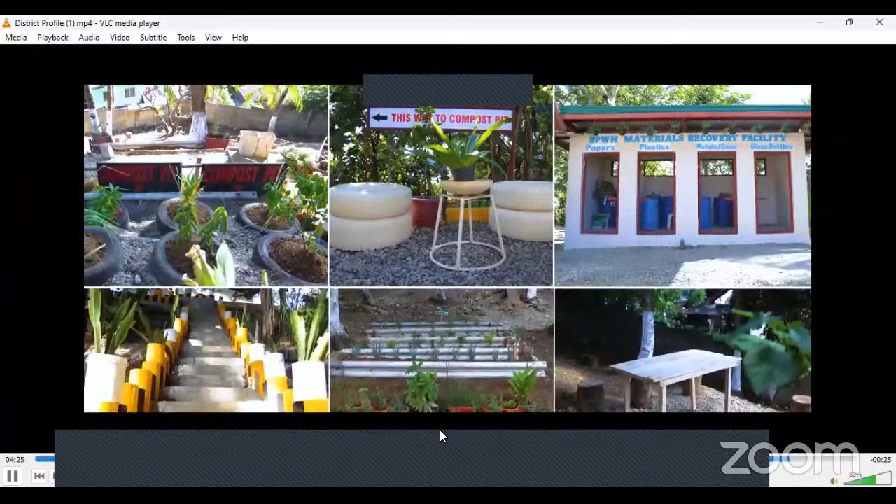The district does not only work on improving lives through quality infrastructure, but also works on refining lives by protecting nature. The agency supports environmental activities, maintained and improved its environment-friendly workplace, in which the district earned its nomination as one of the eco-friendly DEO in the Philippines.

The Department of Public Works and Highways Surigao del Norte's 2nd District Engineering Office humbly started with a goal to be an instrument of economic growth. Along with its colorful history, DPWH is now a steadfast agency of the province. Located at the gateway of Mindanao, the district plays a major role in the infrastructure development that focuses on the improvement and widening of roads, bridges, as well as flood control systems, school buildings, and other public facilities.

Its jurisdiction covers 11 municipalities and 1 component city. Currently, the district has a total workforce of 418 employees, 351 job orders, and 67 budgetary personnel.

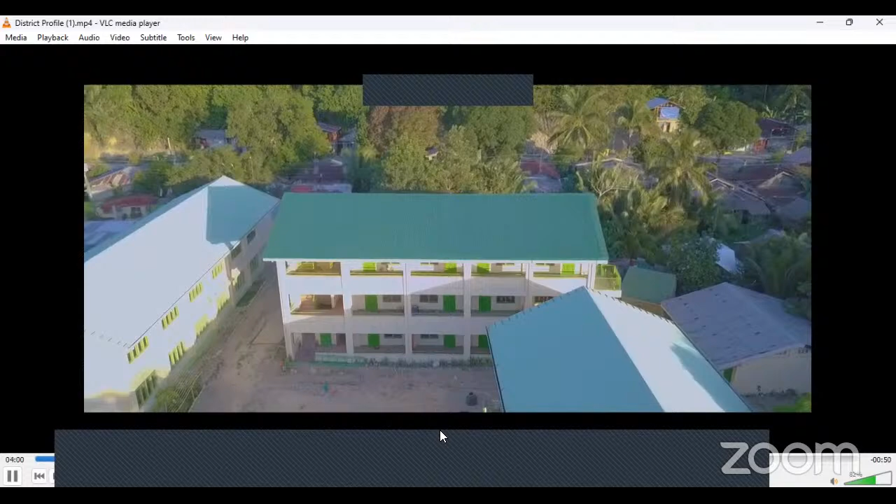Giving solution on classroom shortage, DPWH SDN2 continuously constructs various school building projects in both mainland and island barangays, from a 1-story to a 4-story school and technical workshop buildings.

The district does not only work on improving lives through quality infrastructure, but also works on refining lives by protecting nature. The agency supports environmental activities, maintained and improved its environment-friendly workplace, in which the district earned its nomination as one of the eco-friendly DEOs in the Philippines.

The Department of Public Works and Highways Surigao del Norte's 2nd District Engineering Office humbly started with a goal to be an instrument of economic growth. Along with its colorful history, DPWH is now a steadfast agency of the province.

Located at the gateway of Mindanao, the district plays a major role in infrastructure development that focuses on the improvement and widening of roads, bridges, as well as flood control systems, school buildings, and other public facilities. Its jurisdiction covers 11 municipalities and 1 component city. Currently, the district has a total workforce of 418 employees, 351 job orders, and 67 budgetary personnel.

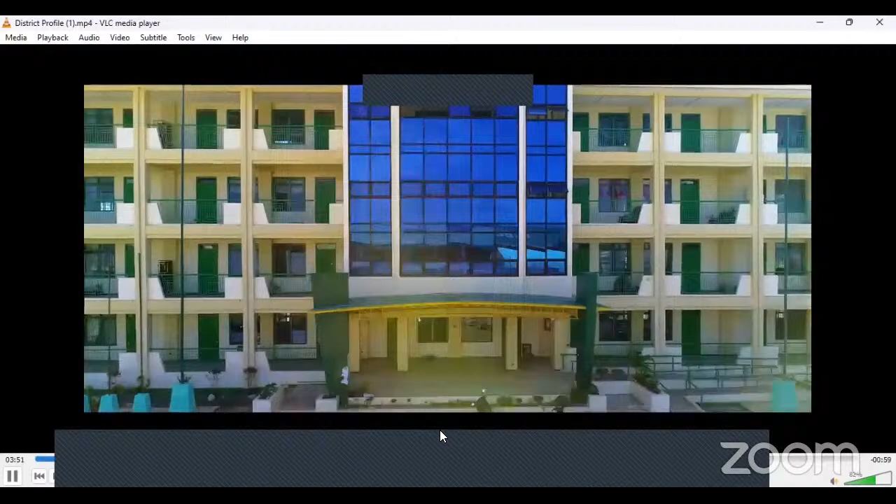Giving solution on classroom shortage, DPWH SDN2 continuously constructs various school building projects in both mainland and island barangays, from a 1-story to a 4-story school and technical workshop buildings.

The district does not only work on improving lives through quality infrastructure, but also works on refining lives by protecting nature. The agency supports environmental activities, maintained and improved its environment-friendly workplace, in which the district earned its nomination as one of the eco-friendly DEOs in the Philippines.

The Department of Public Works and Highways Surigao del Norte's 2nd District Engineering Office humbly started with a goal to be an instrument of economic growth. Along with its colorful history, DPWH is now a steadfast agency of the province.

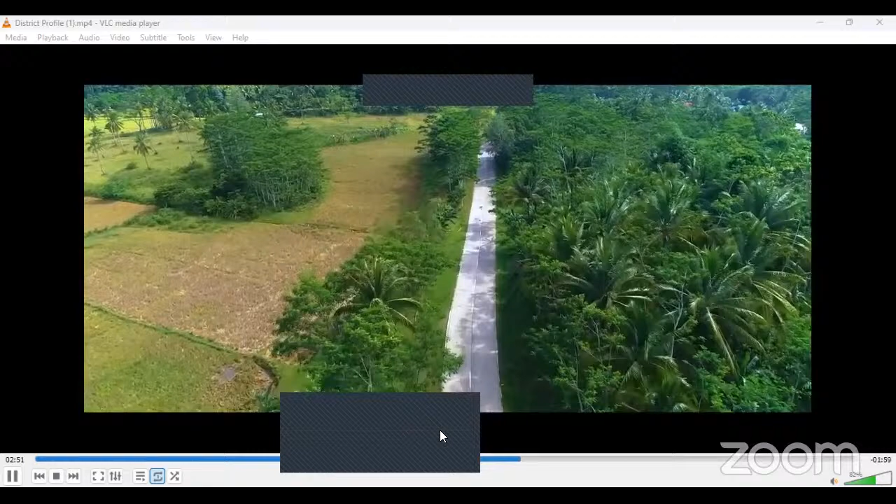The construction of a road opening at the secondary road leading to the city port area, linked from Quezon-Mapawa Road, transverses the Cayutan-Canlanipa Road section, passing through its coastal barangays. This is foreseen to serve as an alternative route with distance savings, particularly for heavy truckload vehicles going to and coming from the seaport area. This road also interconnects the city streets for easy mobility of motorists and delivery of goods and services.

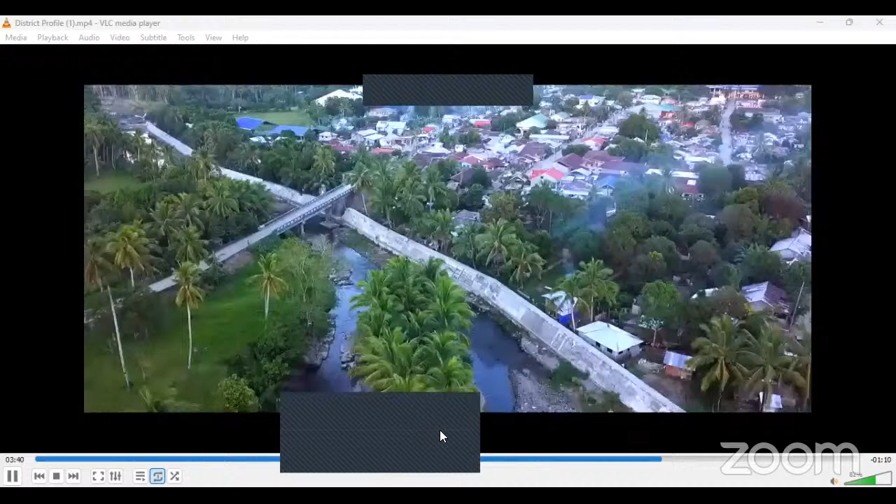The district also implemented road projects in the countryside that enhance and hasten economic development in terms of tourism, delivery of goods, and access to social services. To address critical flood problems of the province, the district is building mitigating structures and drainage systems that would prevent damage of properties and loss of lives.

Giving solutions to classroom shortages, DPWH SDN2 continuously constructs various school building projects in both mainland and island barangays, from one-story to four-story school and technical workshop buildings. The district does not only work on improving lives through quality infrastructure, but also works on refining lives by protecting nature. The agency supports environmental activities and has maintained an environment-friendly workplace, earning its nomination as one of the eco-friendly District Engineering Offices in the Philippines.

The Department of Public Works and Highways Surigao del Norte's 2nd District Engineering Office humbly started with a goal to be an instrument of economic growth. Along with its colorful history, DPWH is now a steadfast agency of the province. Located at the gateway of Mindanao, the district plays a major role in infrastructure development, focusing on the improvement and widening of roads, bridges, flood control systems, school buildings, and other public facilities. Its jurisdiction covers 11 municipalities and one component city. Currently, the district has a total workforce of 418 employees, 351 job orders, and 67 budgetary personnel.

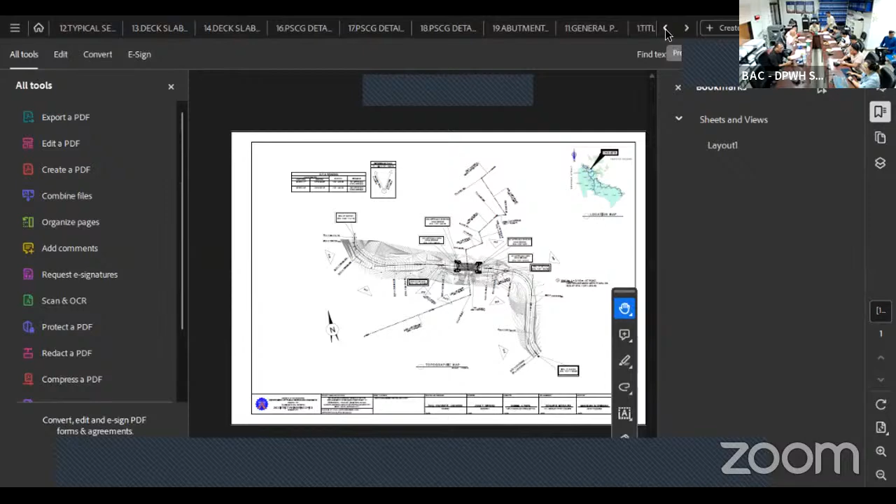Okay, so we have here the summary of quantities. Item A.1.1(8), provision of field office for the engineer. Unit is months, total quantity per plan is 7.40, per program is 7.40. Next, A.1.2(1), provision of 4x4 pickup type service vehicle for the engineer, 1 unit. A.1.2(5), operation and maintenance of the 4x4 pickup type service vehicle for the engineer. Unit is vehicle per month, 7.4 per plan and 7.4 per program.

Next is B.4(5), bridge survey and staking. Unit is lump sum, quantity per plan is 1 and per program is 1. B5, project billboard and signboard. Unit is each, 3 quantities per plan and per program as per DO 58 series of 2006. Next is B.7(2), occupational safety and health program, lump sum, quantity is 1 per DO number 56 series of 2006.

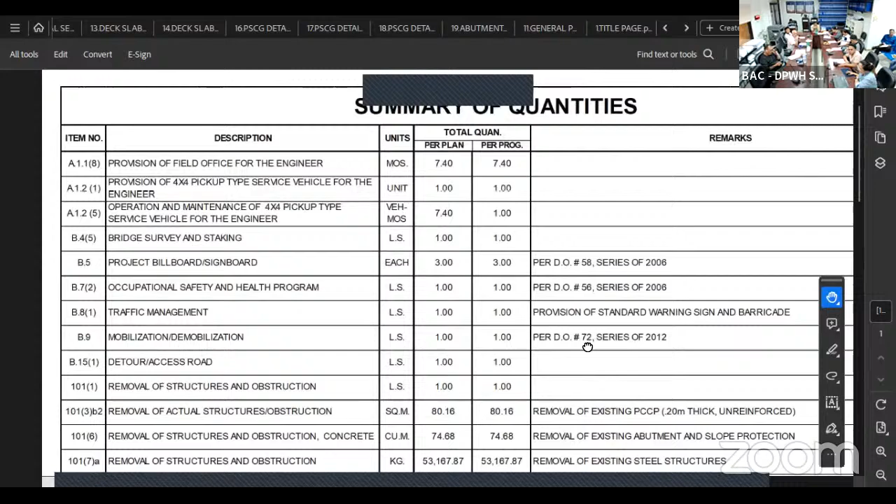101.1, removal of structures and obstruction, lump sum, quantity per plan and program is 1. 101.3B2, removal of actual structures and obstruction, per square meter, quantity is 80.16 per plan and per program. Remarks: this is the removal of existing PCCP, 0.20 meters thick, unreinforced. And 101.7A, removal of structures and obstructions, unit is kilogram, quantity is 53,167.87 per plan and per program. It is the removal of existing steel structures.

103.2A1, bridge structures excavation, common soil, per cubic meter, 380.90 per plan and per program. 104.2A, embankment from borrow, common soil, unit is cubic meter, quantity is 612.43 per plan and per program.

204.1A, Portland cement stabilized road mix base course, new soil aggregate, per cubic meter, quantity is 12.52 per plan and per program. This is for approach slab A and B, 0.20 meter thick. 3112F1, Portland cement concrete pavement reinforced, 0.30 meter thick, 14 days, unit is square meter, quantity is 62.59 per plan and per program. This is for the approach slab A and B.

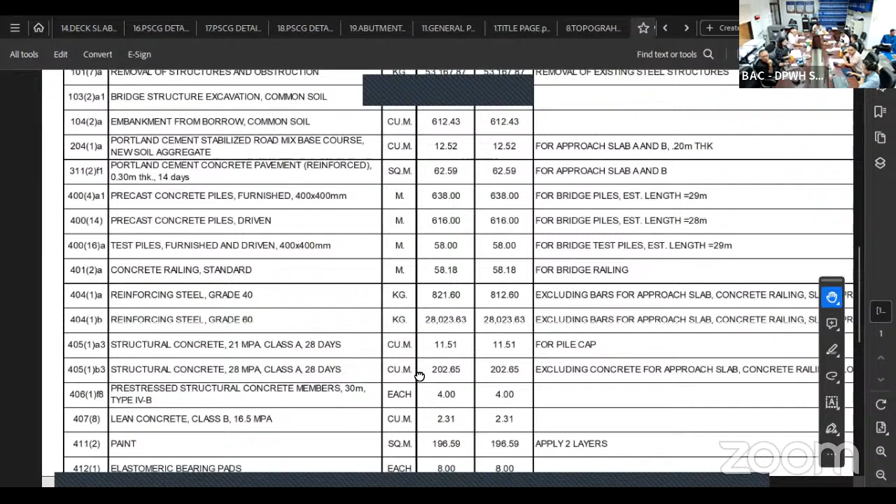Next is 4012A, concrete railing standard, unit is meter, quantity is 58.18 as per plan and per program. This is for the bridge railing. 4041A, reinforcing steel grade 40, unit is kilogram, quantity is 821.60 as per plan per program, excluding bars for approach slab, concrete railings, and slope protection. 4041B, reinforcing steel grade 60, unit is also kilogram, quantity is 28,023.63 as per plan and per program, excluding bars for approach slab, concrete railings, and slope protection.

4051A3, structural concrete 21 MPa, class A, 28 days, unit is per cubic meter, quantity is 11.51 as per plan and per program for this pile cap. And 4051B3, structural concrete 28 MPa, class A, 28 days, unit is per cubic meter, quantity is 202.65 as per plan and per program, excluding concrete for approach slab, concrete railings, and slope protection.

4061 F8, pre-stressed structural concrete members, 30 meters, type 4B. Unit is each, and the quantity is 4 as per plan and program. Next is 4078, lean concrete class B 16.5 MPa. Unit is cubic meter, and the quantity is 2.31 as per plan and program.

4112 paint, unit is square meter, and the quantity is 196.59 as per plan and program. Remarks: apply 2 layers. And 4121 elastomeric bearing pads, unit is each, and the quantity is 8 as per plan and program.

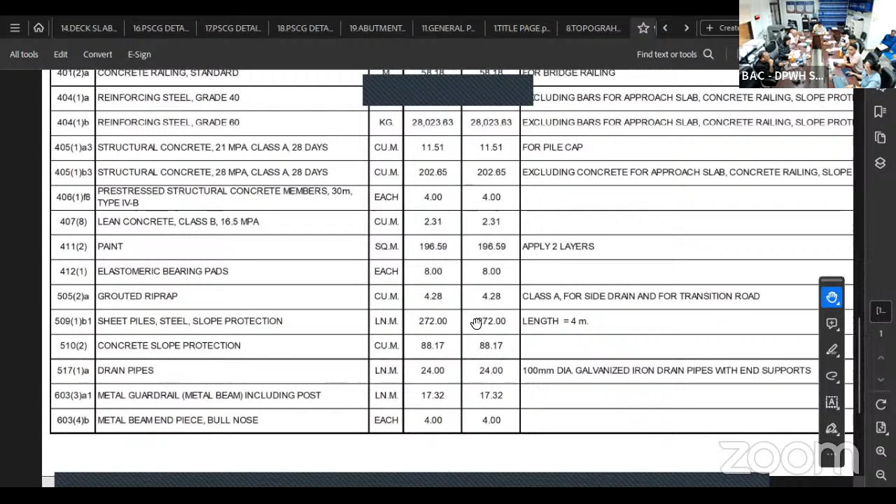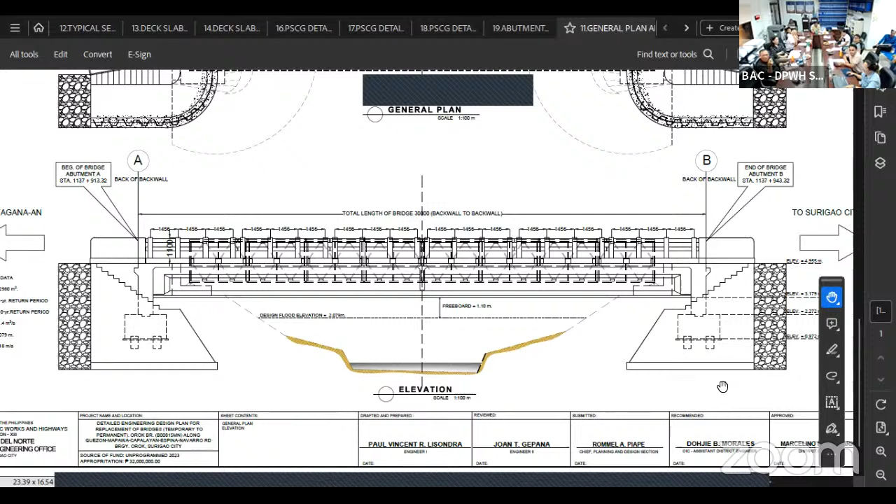So we have here the elevation, the design flood elevation of 2.079, and the freeboard is 1.10 meters from the design flood elevation. So the elevation there, at the riverbed, this is the elevation.

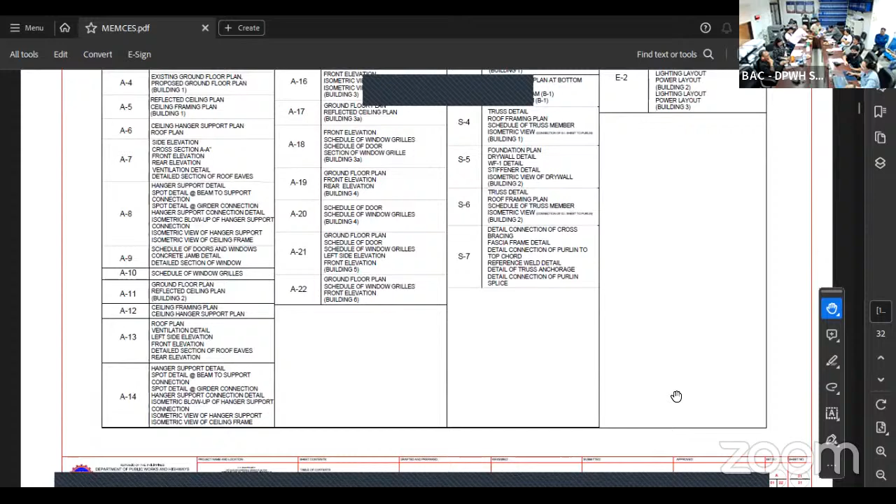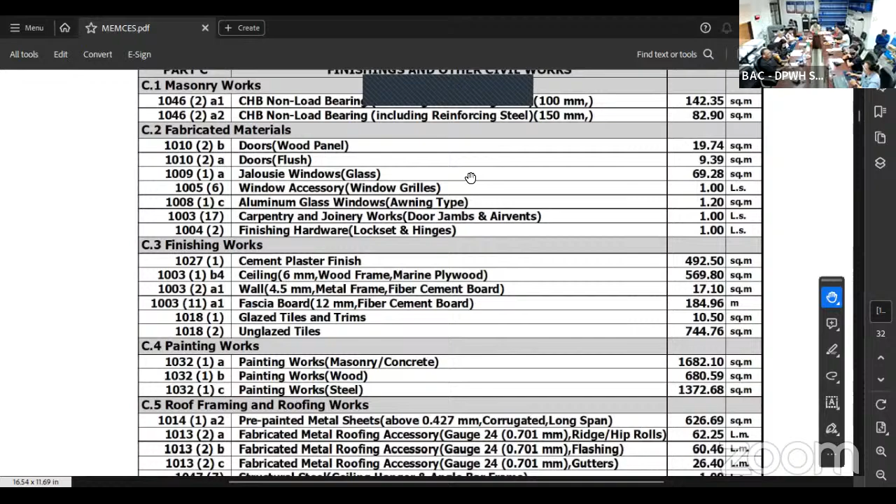For painting works: item 10321A painting works for masonry or concrete, 1,682.1 square meters. 10321B painting works for wood, 680.59 square meters. 10321C painting works for steel, 1,372.68 square meters. For roof framing and roofing works, item 1014182 pre-painted metal sheets above 0.427mm thick, corrugated long span.

626.69 square meters. 10132A fabricated metal roofing accessories for ridge or hip rolls, 62.25 linear meters. 10132B fabricated metal roofing accessories for flashing, 60.46 linear meters. 10132C fabricated metal roofing accessories for gutters, 26.4 linear meters.

10477 structural steel for ceiling hanger and angle bar frame, lump sum. 10478A structural steel for trusses, 59,980.02 kilograms. 10478B structural steel for purlins, 5,424.26 kilograms.

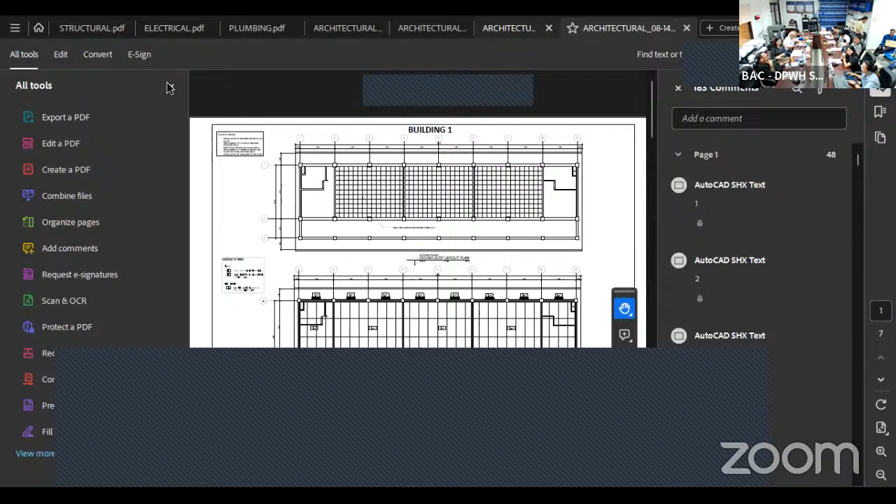Good morning everyone, ma'am and sir. I'm going to present to you the project repair of classrooms, Surigao del Norte National High School, Surigao City, Surigao del Norte. So let's proceed to the quantities.

Item B.3 permits and clearances, 1 lump sum. Item B.5 project billboard signboard, 2 each. Item B.72 occupational safety and health program, 1 lump sum. Item 8011 removal of structures and obstruction, 1 lump sum. Item 80178 removal of structures and obstruction for steel.

22,163.66 kilograms. Item 9001I structural concrete class A 28 days, 8.98 cubic meters. Item 9021A1 reinforcing steel, grade 40, 262.65 kilograms. Item 9032 formworks and falseworks, 1,945.86 square meters. Item 10462A1 CHB, 100 millimeters thick, 34.42 square meters.

Item 100317 carpentry and joinery works, 1 lump sum. Item 10042 finishing hardware, 1 lump sum. Item 1005 steel window, 1 lump sum. Item 10081A aluminum glass windows sliding type, 13.27 square meters. Item 10081D aluminum glass windows fixed type, 2.04 square meters.

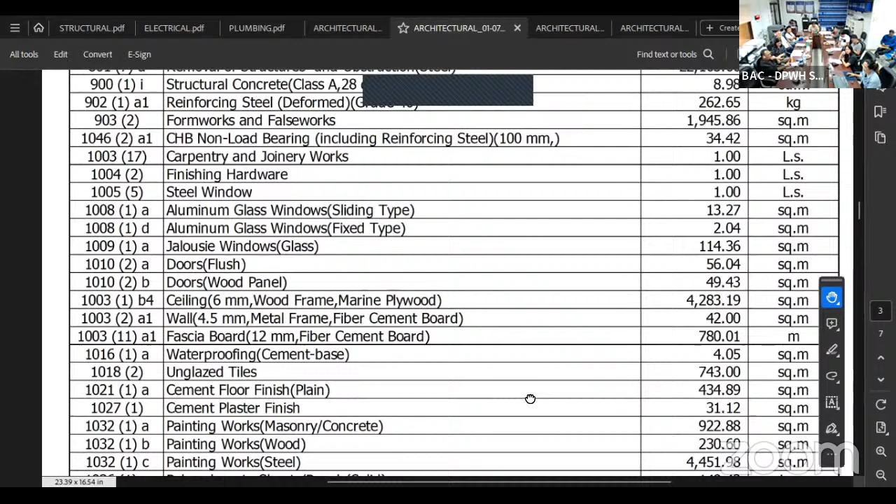Item 10182 unglazed tiles, 743 square meters. Item 10211A cement floor finish, 434.89 square meters. Item 10271 cement plaster finish, 31.12 square meters.

Item 10321A painting works, masonry and concrete, 922.88 square meters. Item 10321B painting works, wood, 230.6 square meters. Item 10321C painting works, steel, 4,451.98 square meters. Item 10361A polycarbonate sheets, solid, 149.43 linear meters.

Item 1014182 pre-painted metal sheets, corrugated long span, 2,681.38 square meters. Item 10132A fabricated metal roofing accessory, ridge rolls, 303.25 linear meters. Item 1013-2B fabricated metal roofing accessory, flashing, 235.09 linear meters. Item 1013-2C fabricated metal roofing accessory, gutters, 4.5 linear meters.

Item 1047-7, structural steel, 1 lump sum. Item 1047-8A, structural steel, trusses, 19,160.81 kilograms. Item 1047-8B, structural steel, purlins, 18,774.93 kilograms. Item 1047-4B, metal structure accessories, turnbuckle, 190 each.

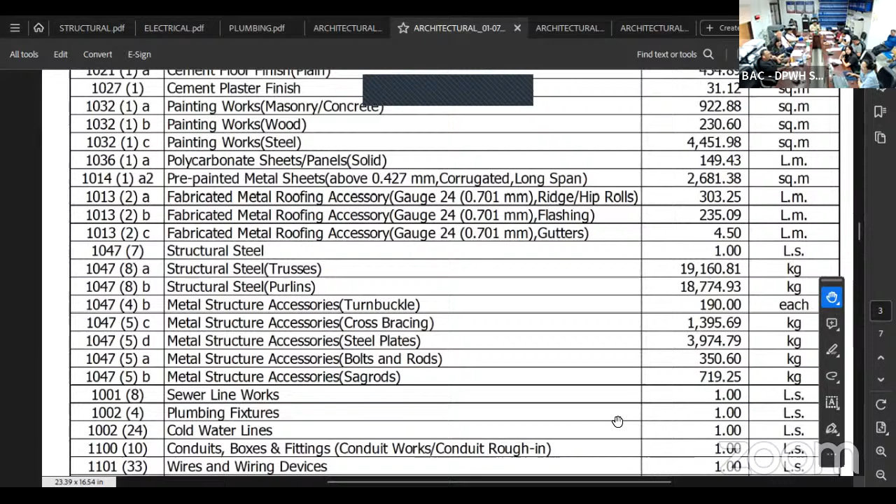Item 1002 (4), plumbing fixtures, 1 lump sum. Item 1002 (24), cold water lines, 1 lump sum. Item 1100 (10), conduits, boxes, and fittings, 1 lump sum. Item 1101 (33), wires and wiring devices, 1 lump sum. Item 1103-1, lighting fixtures including ceiling fan, 1 lump sum.

So for the project, construction of drainage, Barangay Cantugas, Mainit, Surigao, starting station 0 plus 106.65, station 0 plus 210. Net length

103.35 meters. So this is the floor plan, you can see the drainage for this project. So it starts from the junction, followed by the main river creek, so on the right side is the portion of the drainage.

So for the summary contents for this project, first item 101 dito, removal of structure/obstruction, 0.20 meter thick PCCP unreinforced, 7.2 square meter. Next 101.6, removal of structure, obstruction, concrete, 11.73 cubic meter. Next 103.1, structure excavation, common soil, 175.51 cubic meter.

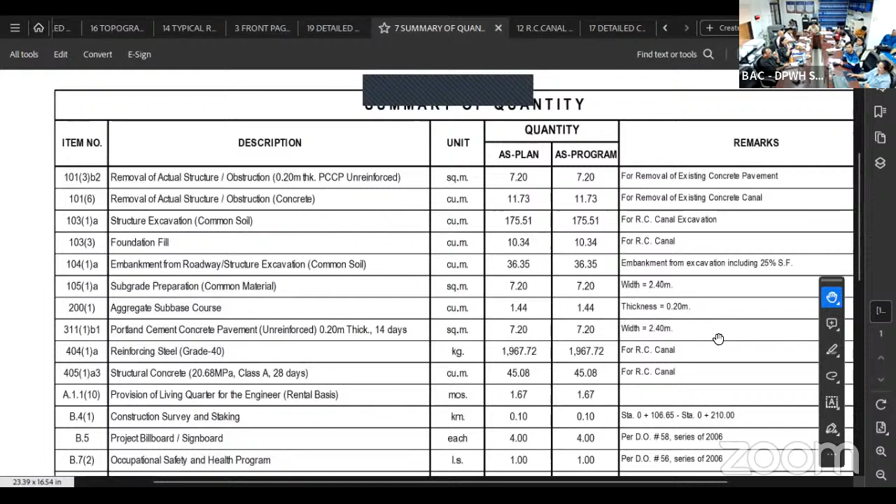Next, item 200(1), aggregate subbase course, 1.44 cubic meter. Next, item 311, 1B1, Portland cement concrete pavement unreinforced, 0.20 meter thick, 14 days, 7.2 square meter. Next, item 4041A, reinforcing steel grade 40, 1,967.72 kilogram.

Next, 405, 1A3, structural concrete, 45.08 cubic meter. Next, item A1110, provision of living quarter for engineer, rental basis, 1.67 month.

Next, B41, construction survey and staking, 0.10 kilometer. Next, B5, project billboard, 4 each. Next, B72, occupational safety and health program, 1 lump sum. Next, B81, traffic management, 1.67 months. Last, B9, mobilization demobilization, 1 lump sum.

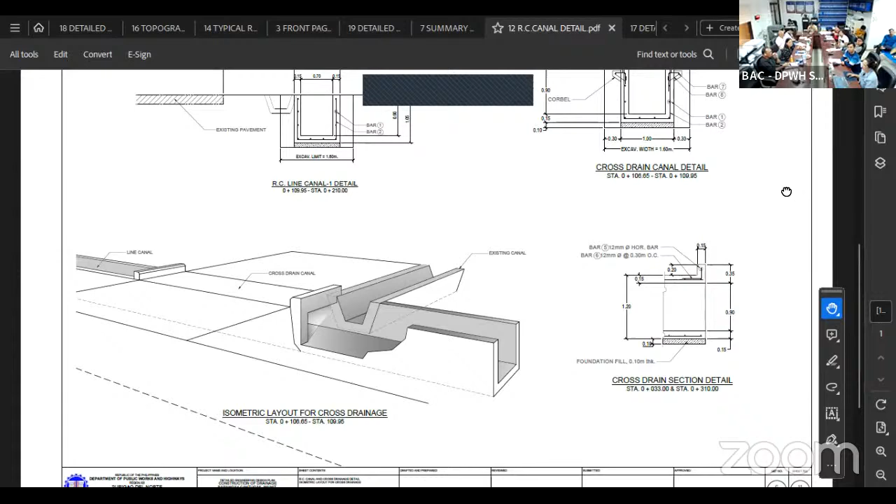So this is the typical section of the drainage canal. There is a portion on the left side. So the connection at the beginning, the cross drain that will be made here, connecting to the left side drain there. So the cross drain canal is 1 meter in width.

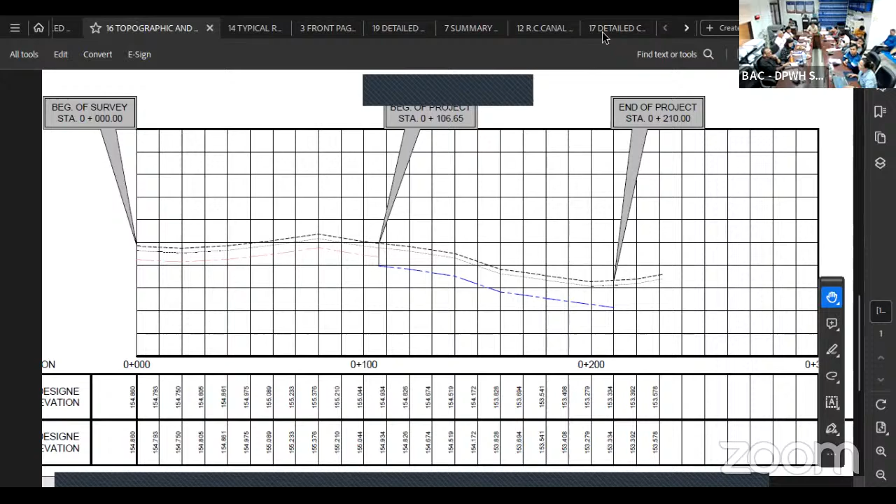So, this shows the two sections of the project.

So, there is the existing canal shown, marked in red.

All contractors who want to join must request a schedule for the site inspection and must have geo-tagged photos with the representative from the planning and design section. The inspection must include technical personnel from the contractor. We will not accommodate contractors who send a liaison only; the inspection requires technical personnel.

By technical, it must be a civil engineer, or similar, with PRC ID, and also a company ID specifying that they are part of the firm. So that is clear.

So as stated in DO 11 series of 2017, the minimum laboratory and major equipment required. Kindly refer to DO 11 as per the prescribed format in that DO.

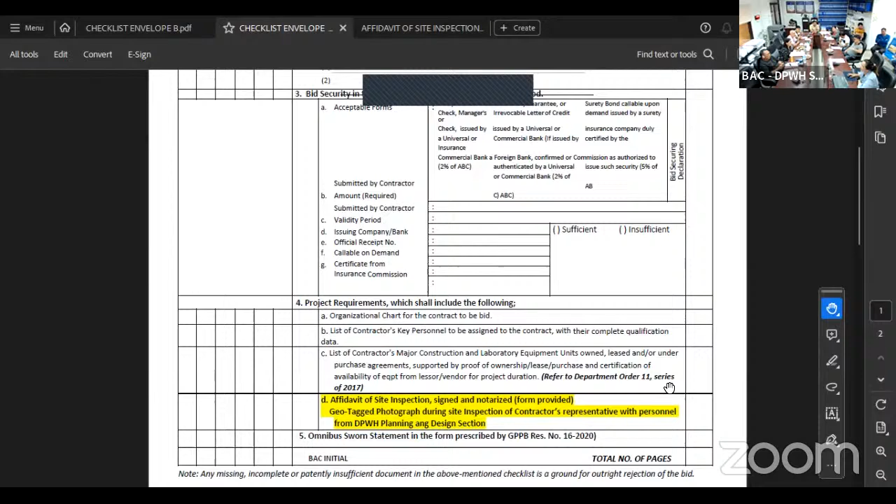So for any queries, you can visit the DPWH Surigao Norte Second District Engineering Office, Bidding and Awards Committee, and look for Engineer Maria Apugina Vivero for procurement concerns. Any other concern from the board members about DPWH?